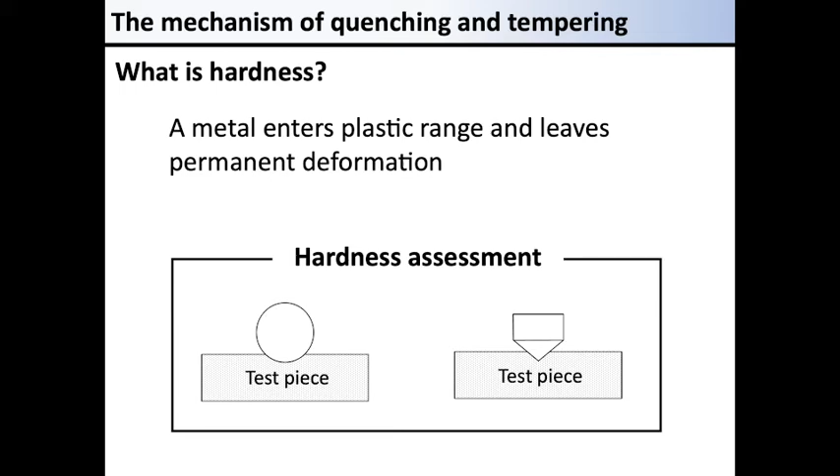Iron atoms are bound together by metallic bonds. To understand the mechanism of quenching, we need to understand how metals, including ferrous metals, are deformed from the viewpoint of atoms. Iron atoms are bonded and arranged together by metal bonds. Now, we are thinking about applying a force to deform them.

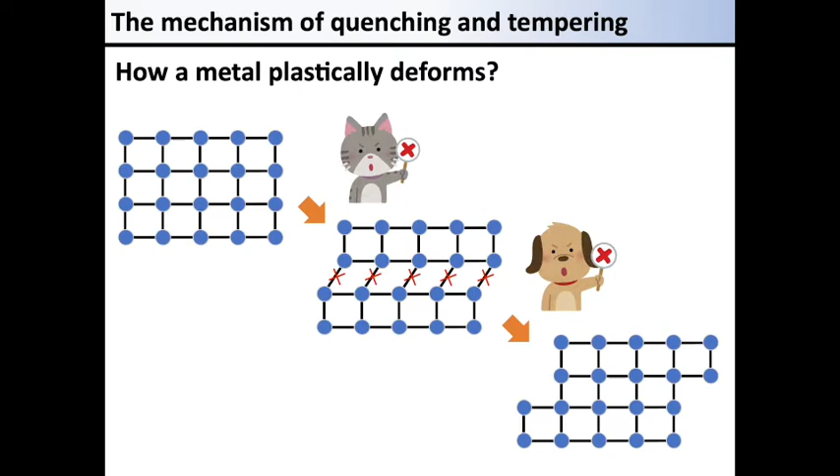You may imagine each of the metal bonds breaks and the arrangement of atoms shifts in the metal deformation. In reality, however, these metal bonds are quite strong, and it is not easy to break all of these bonds to displace the arrangement of the atoms. Now, we are arguing about what is going on with the atoms and bonds when a metal deforms in reality.

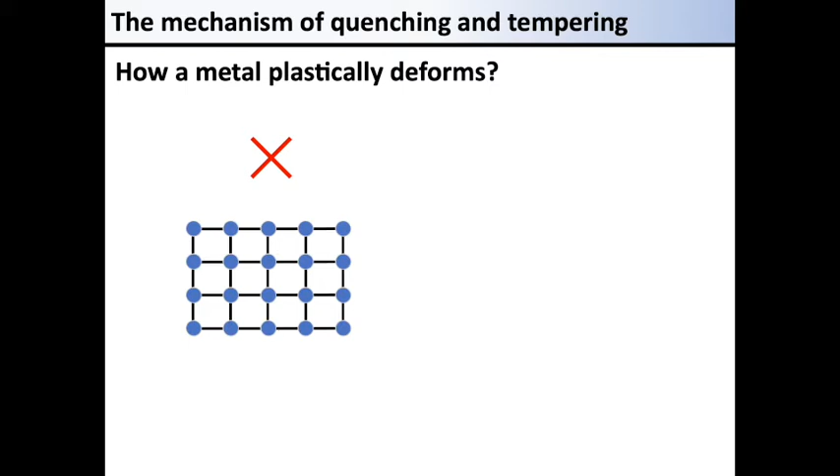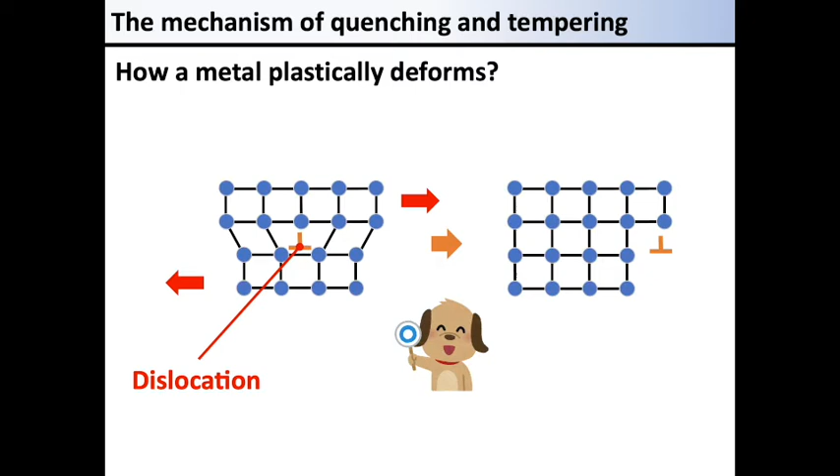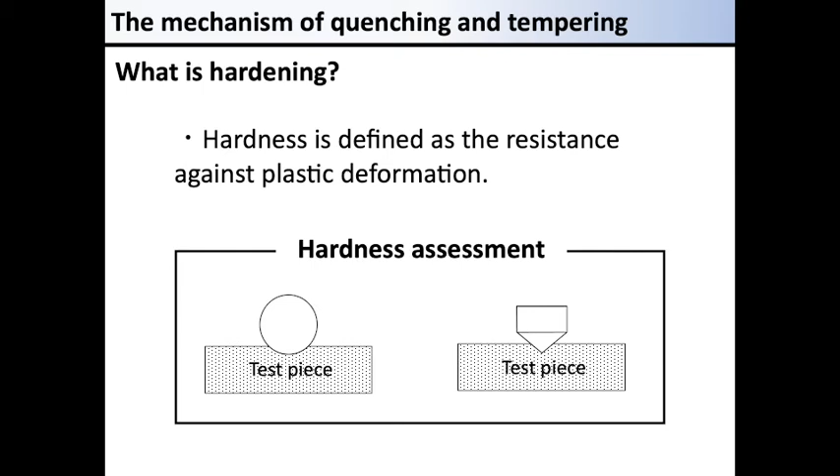Based on the argument before, I am now explaining why ferrous metals become harder when quenched. Plastic deformation of a metal is caused by the movement of dislocation. As we explained earlier, hardness is defined as the resistance against plastic deformation. So, hardening is equivalent to making the dislocations difficult to move.

The quenching process hardens the material. So, quenching makes the transportation of dislocations more difficult by using heat treatment processes. We should focus on what exactly is happening to understand the mechanism of quenching.

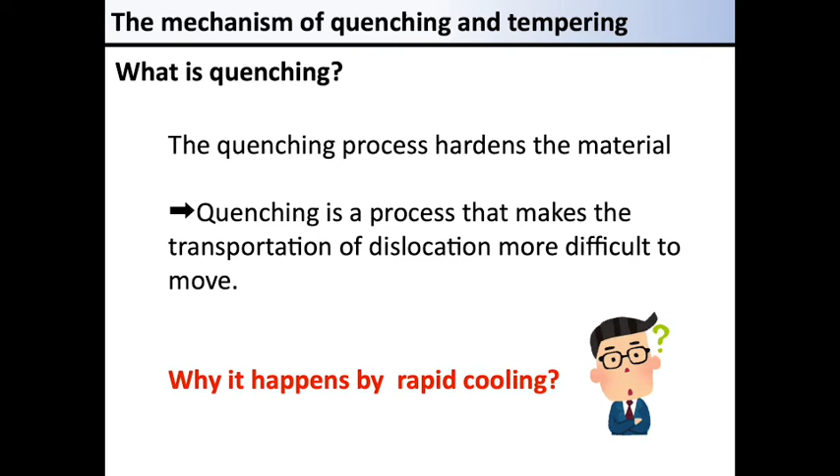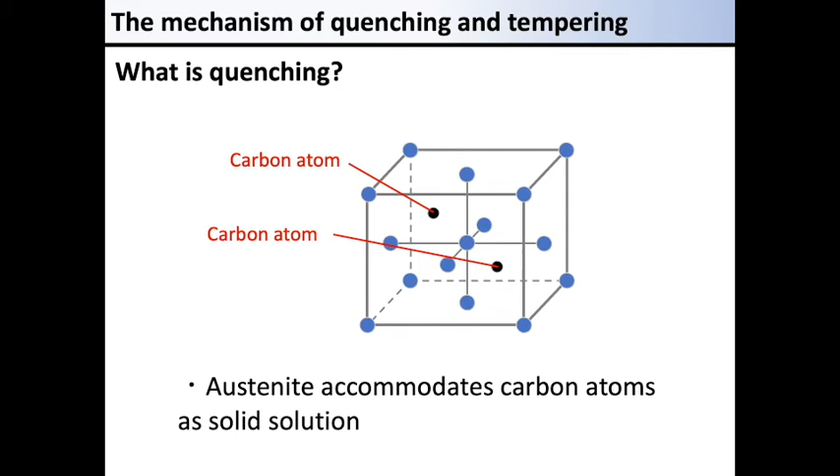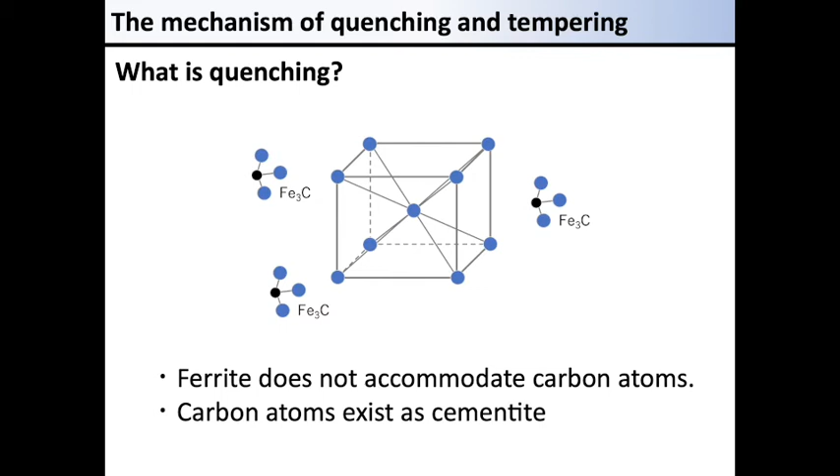Quenching is carried out by heating a ferrous metal to a state where its crystalline structure contains austenite, and then rapidly cooling it. We have already discussed that, unlike ferrite, austenite accommodates more carbon atoms as solid solution. Austenite accommodates carbon 2.1% as the solid solution. On the other hand, at room temperature, ferrite only accommodates 0.008% of carbon as its solid solution. So, carbon atoms exist as cementite bonding iron atoms.

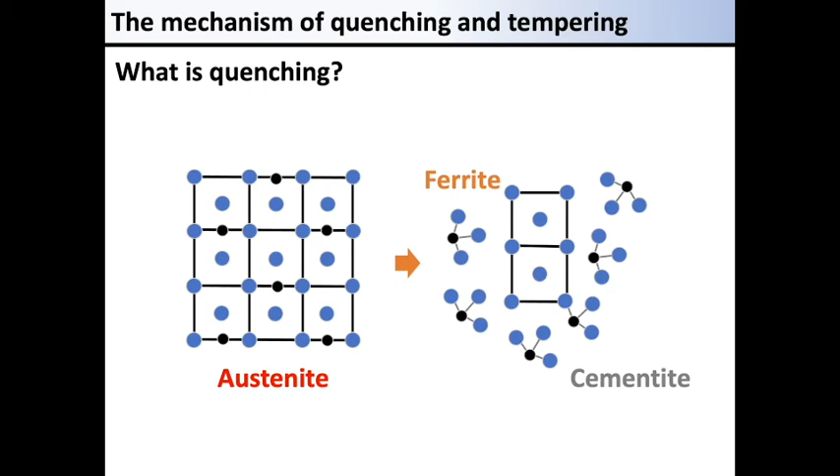Now, we are thinking about a case where carbon-rich austenite is cooled slowly. The carbon atoms that were not included in ferrite are bonded with iron atoms to be cementite. So, at room temperature, the structure is composed of ferrite and cementite. On the other hand, in the case of quenching, we are rapidly cooling down carbon-rich austenite. Let's see what happens in this case.

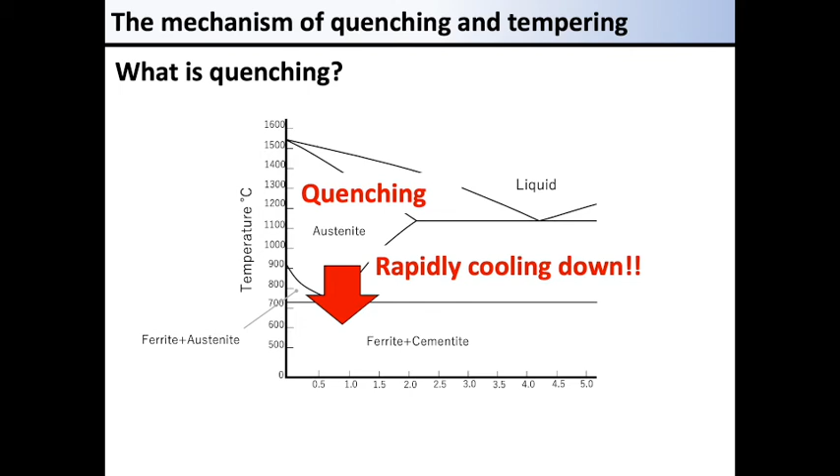When austenite is rapidly cooled down, it becomes martensite with carbon atoms trapped in a body-centered cubic lattice. This state means there are a large number of dislocations, distortions of the arrangement of atoms. When a large number of dislocations exist in the crystalline structure, they collide with each other and make it difficult to move.

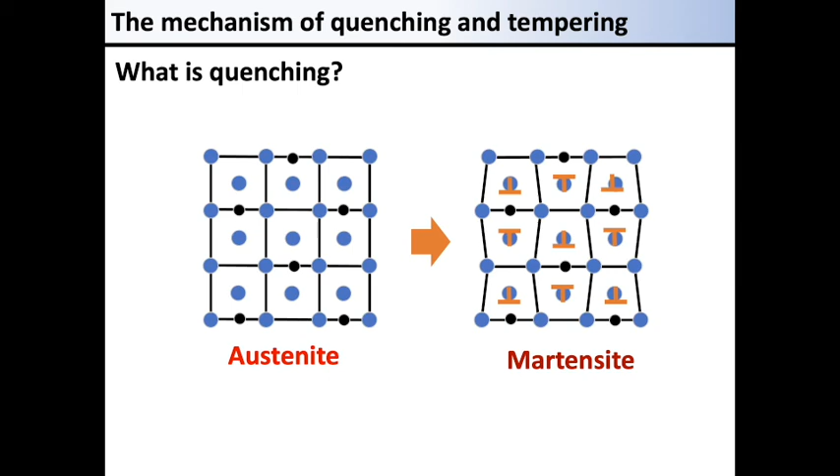In addition, when a crystal is rapidly cooled down, the grain sizes are smaller in the crystalline structure because the grains do not have enough time to grow. So, more energy is required for the dislocations to move across the grain boundaries. This is another reason why rapid cooling makes the dislocations more difficult to move.

Quenching and tempering are performed in pairs. Quenching is the process to harden metals, while tempering is the process to attribute ductility to the hardened metal. What is going on in this tempering process?

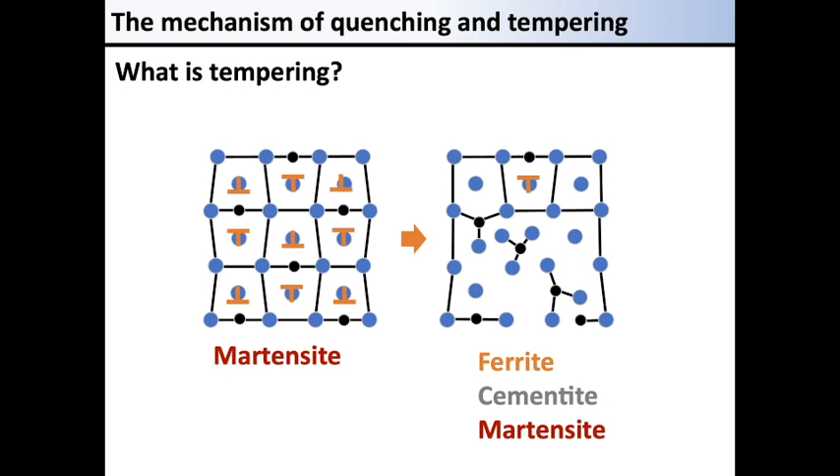The tempering process involves heating the atoms to make them easier to move. Then, the carbon atoms trapped in the ferrite are released to become stable cementite. The ratio of cementite to martensite is adjusted by the time of heating to control the hardness and ductility.